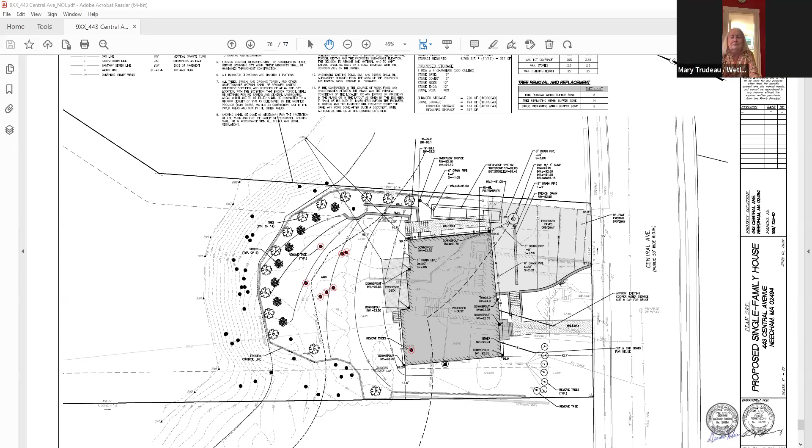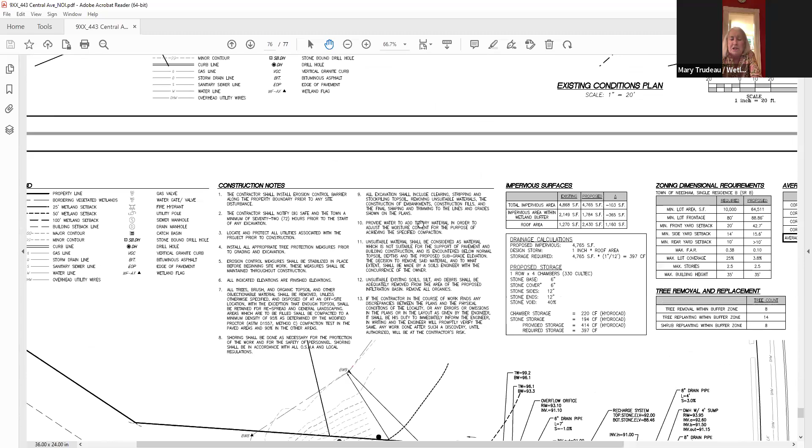So let me go to commissioners, see what questions they have. Bill? So the trees circled in red are the 8 trees that are going to be removed? Yes, they are. The black dots represent all of the trees that were in the buffer zone on this side of the property. The property is expansive. I mean, this is maybe a third of the entire lot. We didn't topo, you can see, we didn't do any fact finding on the backside.

And there were 13 trees. There were 8 significant trees, I think. What does significant mean? In your tree bylaw, it says if it has a diameter at breast height of 6 inches or greater. Okay, I'd just point out that we also had a definition of a significant tree, quote unquote, that was 32 inches or greater DBH, and that required a 3-to-1 ratio. So I wouldn't use the word significant, just say applicable.

Yeah. I mean, we were open to discussing the replacement values and thinking about what this site really should look like. But we've put this forward to you as a first pass to see if we do meet your performance standards. Okay, Bill, anything else? So you picked these 8 out of the 13. Was there a reason for picking these?

It has to do with the grading on the site more than it has to do with the quality of the trees. As I noted, we want to be able to drive into this garage, which means setting the grade of the house at a certain elevation, which required that we raise the backyard to match the house. So you can see at the top of the drawing on the east side, we show 2 small retaining walls. And that helps us minimize our fill as well.

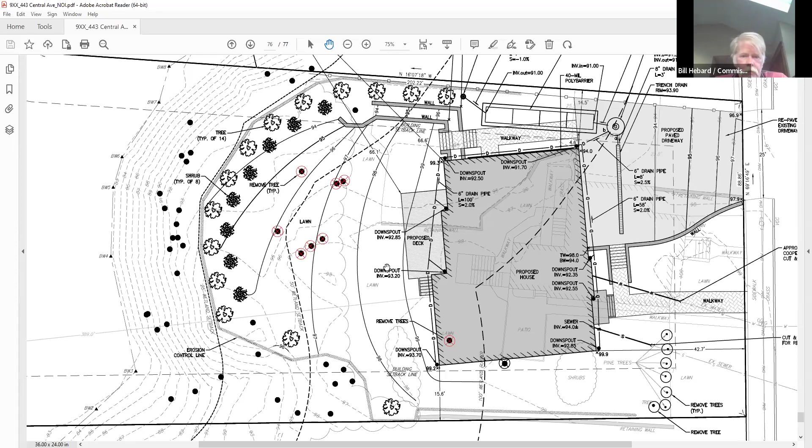Just wanted to touch base on the garage. We put the garage on the front instead of the side. The reason to put it on the front is to create less pavement, and also create better pitch to the driveway, to the garage, so that way it's not a deep incline. Right now, the driveway is really on an incline, and we're trying to avoid that, especially with a busy road.

An end user coming in and out could be quite dangerous if they slip up or lose the grip and run onto the road or down into the driveway, into the garage. So that's that. As far as the setback, yes, the house is located very close to the street. Old setbacks, who knows when it was changed, but the setbacks back then were not really in existence, or if they were, very close. The new setbacks are on average 25 feet, 20 feet from the front, so that's what we're going by.

Also to address your deck question, very great question. It is a deck that water can go right through, so it's not any kind of roof or anything. And we're planning to put drainage underneath it with about 12 inches of crushed stone to be able to drain the water. So all the water that would be coming off of that deck would go right into the stone. And the gutters, as you can see, are placed everywhere. So all that water is going into the infiltration system on the right of the house. Along with, as Mary mentioned, this is well designed to accept 1 inch of water on the entire property.

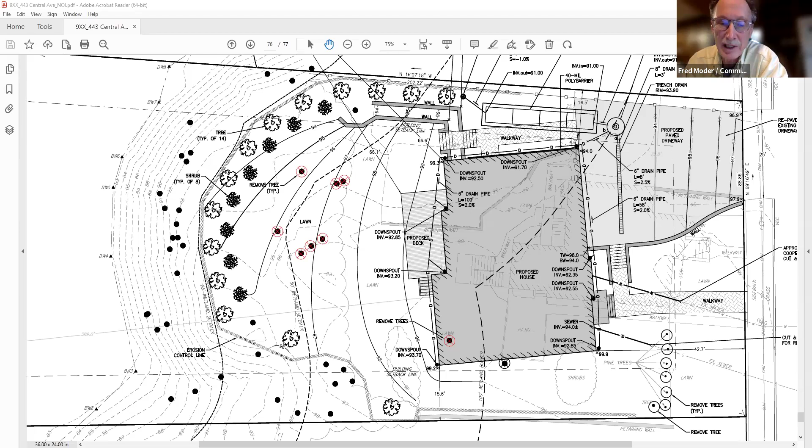Fred, anything? Does anyone have any more questions on the trees that are in red and why some of them could stay and some have to be eliminated? Well, let's go down through the commissioners now. Fred, any comments? My question is, is impervious surface moving closer to the wetland with this new project or not? And I'm wondering where the new planting of trees would be. I see the shrubbery, but I assume that's different from where trees would be planted.

Well, the trees that we're showing are the white flowery looking symbol. And I believe we're showing the planting of 14 native trees. And then the plantings in front of them were the shrubs. In real life, we may stagger them or plant the shrubs in clumps, but it's just a way of us calculating the appropriate density.

In terms of, is the impervious closer? It depends on whether you're talking about the house or the pavement, because there's an expansive parking area that goes fairly deeply into the yard right now that will be coming out, which is how we reduced our impervious cover. I believe the house, because we've set it further back from the street, is closer to the buffer zone, but the pavement that we've removed was the closest feature in the current condition.

And just to Mary's point, you can see underneath the dark gray new proposed perimeter of the home where the old driveway was and how far it goes. It goes way further than even the proposed deck. Yeah, it goes almost to within 30 feet of the wetlands. And that was asphalt? Yes. It is asphalt, you can see it on site now. Someone was using this as a staging area for businesses, so it's quite disturbed.

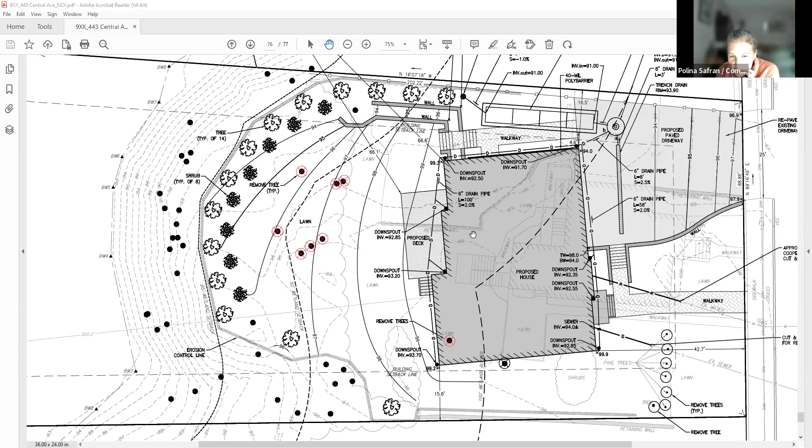I believe your plan says it's lawn in the back of the house. It says lawn there, but it's in light gray, which is existing conditions. I was gonna bring that up and show in the photos. I don't really agree with that designation. I think lawn's an exaggeration. Okay, well, we can get to the photos.

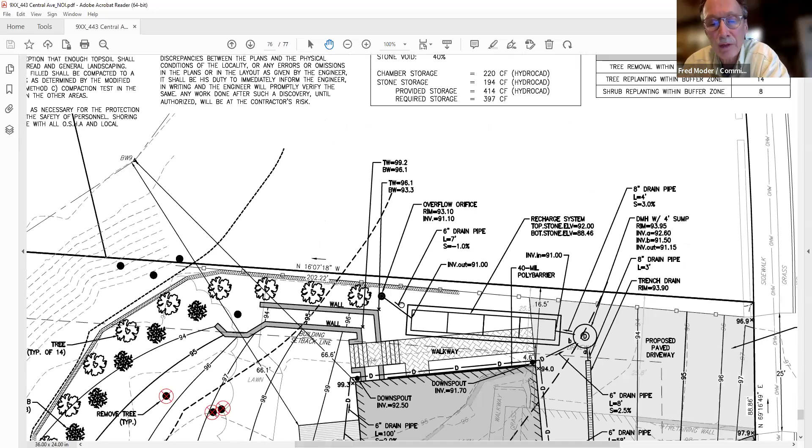Fred, do you have any other questions? One last question. With the additional fill that you're proposing, how is this lot going to compare to the adjoining lots on either side in elevation?

Well, we have a retaining wall on the east side of the lot that will allow us to match grades at the property line. And at the rear, we are our own abutter. We're discharging down towards the back as water flows now. And I believe we're meeting grades on the western property line as well.

Yes, yes. There's also a retaining wall on the left side from that abutter against the driveway, so we're not really disturbing. The house is totally on the opposite side of their lot. So, yeah, everyone has this gully to deal with, or whatever we call it. Quite big of a drop in vegetation and grade. While the infiltration system will reduce the volume of surface water runoff, the pattern of drainage on this lot has not changed significantly.

Okay, yeah, anything? What I'm thinking ahead to is the water absorbing capabilities, capacity that you're gonna lose when you take these trees. You're gonna have a lot of fill with no roots and no sort of soil structure, and how that's gonna change the water flow. I'm not sure I can picture it yet, but that's the question in my mind.

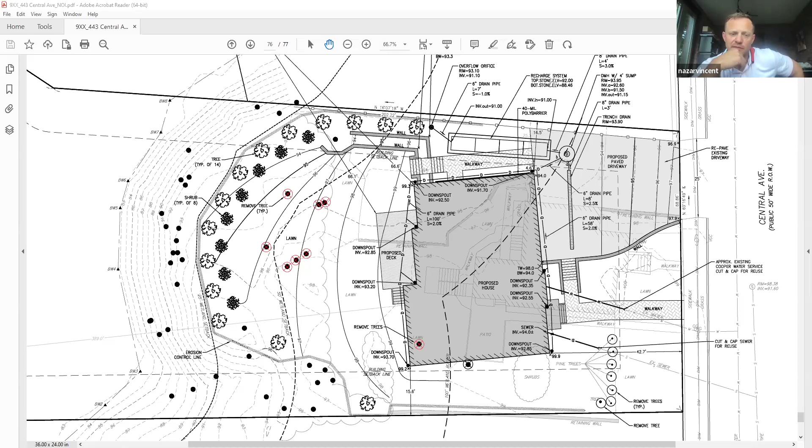And I think that the overall infiltration of the yard will be better because it's not something that's been driven on by trucks and parked with pallets of bricks and things. We're definitely improving the area for sure. It's really a disaster how the land was treated thus far. Okay, those are my questions for now. Thanks. All right, thanks, Fred.

I have a few comments and questions. I actually went out to the site this afternoon, and it's an interesting site, and I would encourage all of the commissioners to take a trip out there, because looking at a two-dimensional plot, unless you're really familiar with this kind of situation, sometimes you don't get the picture. And I know that Deb has some photos. I also have some photos, so we could share those after we get everybody's comments.

I think that the report and the materials that were put together for this application were quite complete, and it makes it easier for us to evaluate what you're doing. I would venture to say that your application could be used as a model for completeness, because there were really no major missing pieces. There are a couple of things that could be improved. One is the trees that you're going to remove, if you could put a number on those trees so that we could correlate it to your list, because I think you did a great job in inventorying the trees.

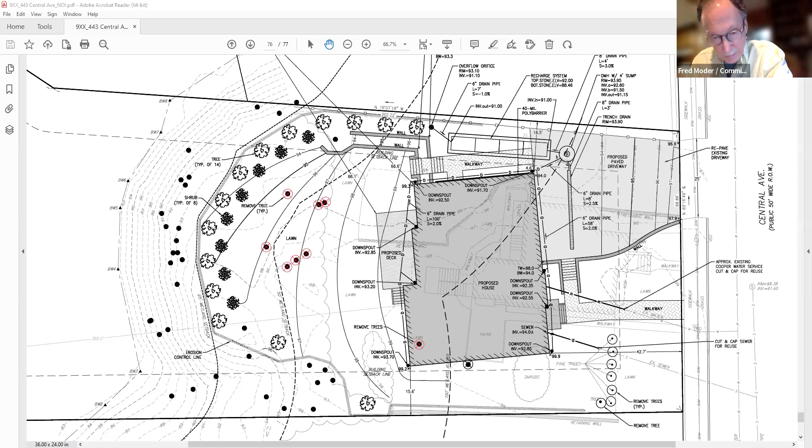Thank you. So I have a few questions. So the whole back of this property is forested, correct? I wouldn't call it forested. It has, I don't know, 22 trees in it. No, I mean the rest of the property. Oh, completely. Yes, yes. Right. It's just a natural wetland and buffer zone area.

So I'm wondering, since this is a forested area, if the 50-foot buffer zone, no disturb, should be enacted here, because that's a large vegetated area that would probably be considered wildlife habitat. So I wanted to bring that up. Are you saying that you think there's habitat on this site? Well, because there is habitat, the whole rest of the property is, and even though this is Norway maples and there isn't much in the way of ground vegetation, it's still a forested area. So it's kind of a continuation of the rest of the property, which may enact the 50-foot kind of no disturb area.

As far as the lawn goes, so it looks like you're gonna be expanding the lawn area, and are you putting the plantings along the perimeter purposefully to have the rest of the area be lawn? Or why couldn't you do the plantings within the area that you're removing the other trees once the fill is in, and kind of naturalize that whole area again? We certainly could. Part of our issue was screening, that it's not a particularly attractive area down below, and there are houses that rim it that in the winter you can see right across. So we had proposed evergreens to try and screen that from this new house, but we can certainly stagger the plants and change the layout slightly.

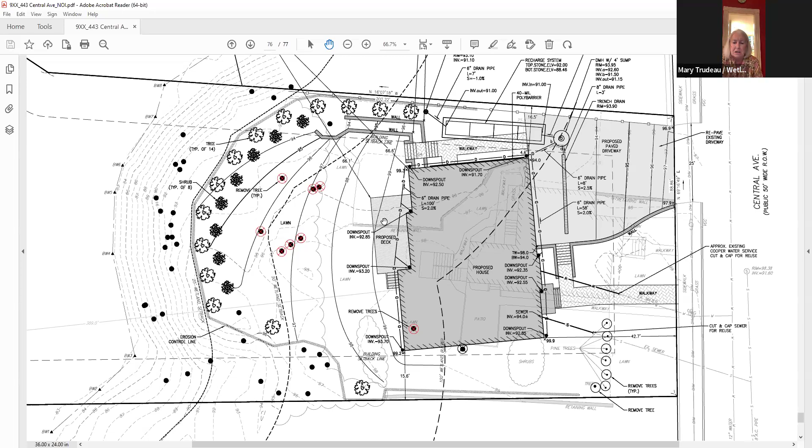Okay, just to bring up one last point. The only trees that are being removed are the ones encircled in red, right? There are others that are pointed out, but we're not removing them. So I found it odd. So the tree report didn't talk about the health of any of the trees. Usually when we see these tree reports, you know, it gives the diameter and kind of the health assessment of the trees that are coming out. I didn't see that as part of this. When I went to the site, it appeared as though the trees were relatively healthy.

So, and all this fill is going in so you can have a below ground drive-in garage, correct? Yeah, I mean, it relates to the elevation of the house. The biggest thing is maintaining the right pitch for ambulance and fire department to pick up in emergencies, and we can't have a steep driveway as ambulance or fire department will not make it up the hill, nor will they even approve this kind of pitch as well. So we're looking to make sure it's adequate distance, not too far, not too close, and we found a balance between all of us, working very hard, I think maybe at least 6 or 7 revisions with the civil engineer to make it all fit on the setbacks and make sure that we have adequate distance for the chamber, because that has to be a good amount of setback from the property line as well.

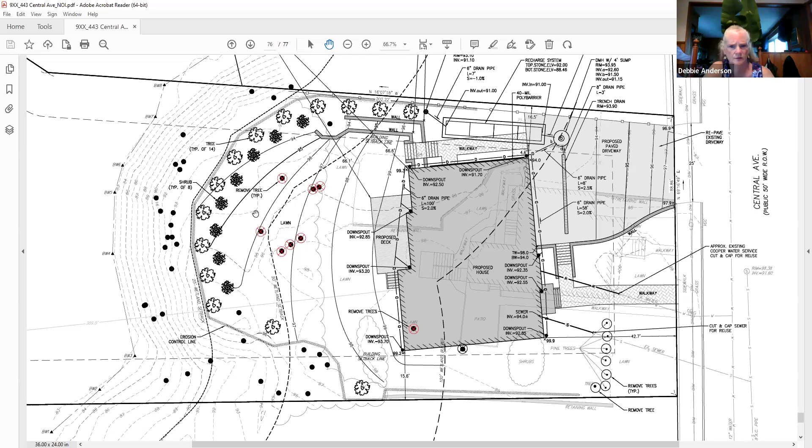Okay, and I guess if the commission wants to see photos, Clay can put those up. Do you know what kind of trees those are between the 25 and the 50-foot setbacks? I think they're Norway. I think the lindens are the 2 towards the front near the end. Yeah, I mean, if they're Norway, another thing we could consider is allow them to be removed, but leave them up as snags. Potentially, we could consider that. Well, is it gonna be lawn area in there? Yeah, I don't think snags is gonna do it. I think that's a dangerous thing, but I think if they're Norway, I'm not sure that the value is there for putting in the tree well. The lindens are the higher quality trees, but they're in an area that's getting more fill.

Yeah. I may want to just share a personal experience. I planted a balsam fir 37 years ago, and in the last 10 years it's declined, and I finally gave up on it.

It's just too hot. It's just too hot here for them now. Yeah, I have two. There are two in my neighbor's yard that are dying too. So yeah, no, I'm happy to look further at our plant list. I just wanted to diversify the white pines a little bit. Sure. It would take place at the right time of the season as well.

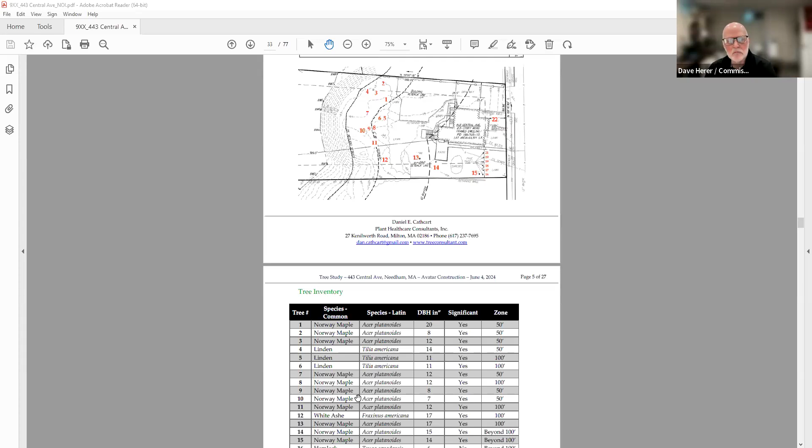We have an arborist that has been specifically hired for this reason to coordinate everything and took all of the diameters, as you can see. Thank you for pointing that out on the plan of which tree is what. Yes, thank you. As I mentioned before, it'd be helpful to put those numbers on the other plan. Yes, sir. So are the trees that are marked in green on the site, are those the ones to be removed, or are those just what were on the tree plan?

I don't know. That's not ringing a bell with me. It may be something that the surveyors tagged. It wasn't something that Nazar or I put up there. Okay. Do you want me to send you the pictures again, Clay? No, I've got them now. Are you ready? Oh, that could have been the arborist that tagged them. If you're saying the trees are tagged, yeah, they have green paint on them, maybe that might be the arborist, because I don't think, unless someone was trying to locate the locations of them.

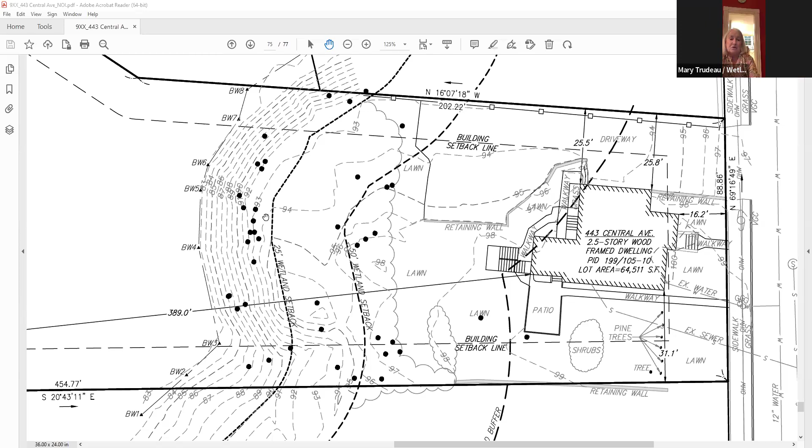Do you have the 25-foot flags out already? Yes, at the top of the slope. It's the 25 you could find because you'll fall off if you go to the 24. Okay, that helps. Yeah, well, I think when you go out there, it's pretty straightforward. Bring a tape measure. Yes, I would say that would be it. You can see my flags out there, and if you assume that when you take a step further and fall, that's the 25.

So I have a question for the commission. When you say the no disturb 50-foot directive, you mean from 0 to 50 there'd be no disturbing? That's correct. There's a 25-foot no disturb, no questions asked zone, and then there's the 50-foot no disturb zone if it's considered to be wildlife habitat. Okay. Thank you.

All right, so if there's no further questions, we should continue this hearing until our next meeting, and hopefully we'll be able to look at the site. Yes, I'm working on it, 1 second. They're just closing here now. There isn't anyone in the audience, right?

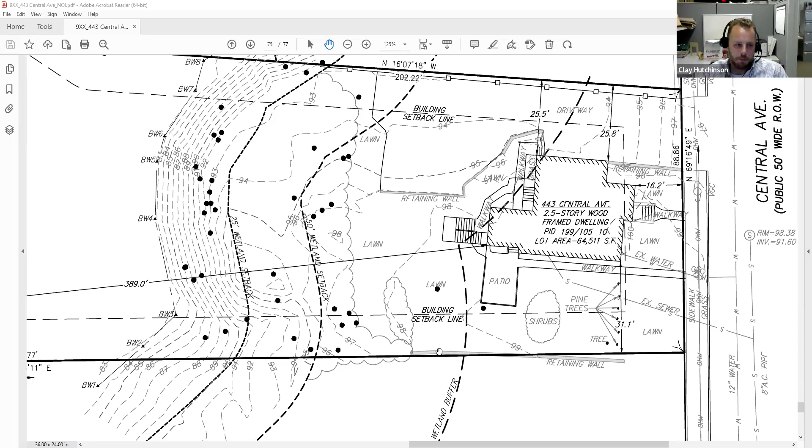Is there any further questions from the commissioners? No? And I don't see any hands in the audience. I did speak with one abutter earlier today who just had concerns related to the retaining wall along the side of the property line. Just looking for additional information or making sure there's due diligence that that retaining wall isn't compromised. For the most part, the retaining wall is outside the buffer zone. It only extends a little bit. So I did defer their concerns as well to the building department, but there was just some concern about maintaining the stability of this wall when they do the grading and the foundation work.

If I may, I can address that. It's pretty far away from where we're digging, and it would not be compromised by anything. I saw that wall. It's pretty stable too. Okay. Yeah, I was contacted by the building department today just to bring that up as well.

Okay. So I'll make a motion to continue this hearing to July 11th, 2024. Okay, let's vote. Sue, aye. Reed, aye. Fred, aye. Melina, aye. Bill, aye. And the chair votes aye. Awesome. We will see you in 2 weeks.